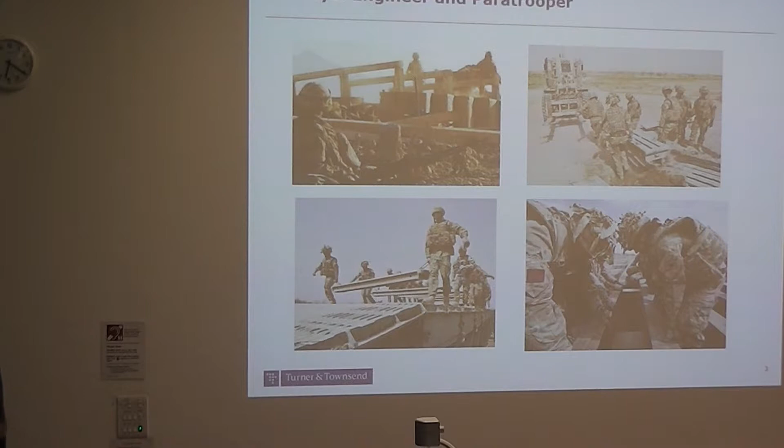So just a bit of background, not so long ago, about 8 years now, I was working as a Royal Engineer in the British Army, even though I'm from South Africa, and a paratrooper. So for about 6 years, I was managing construction projects all over the world. In Afghanistan, I did 2 tours, building bridges, building helicopter landing sites, roads, tunnels, all sorts of construction in arduous conditions.

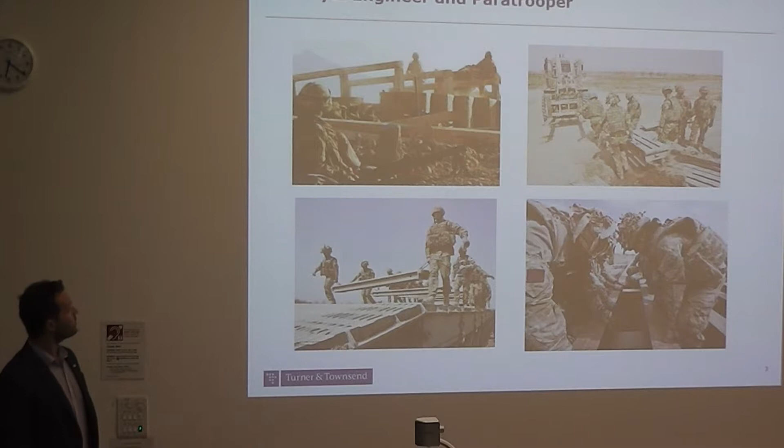I decided after my second tour of Afghanistan that perhaps I had had enough, and I went back to university as a mature student. And that was only 3 years ago. I graduated last year, so I'm very much fresh into working in a civilian context. I've been working for Turner & Townsend for a year now. I work in the technology team, so we are project managers working purely on BIM projects. Those are the 3 projects that I'm currently working on. They all range between 50 to 120 million pounds.

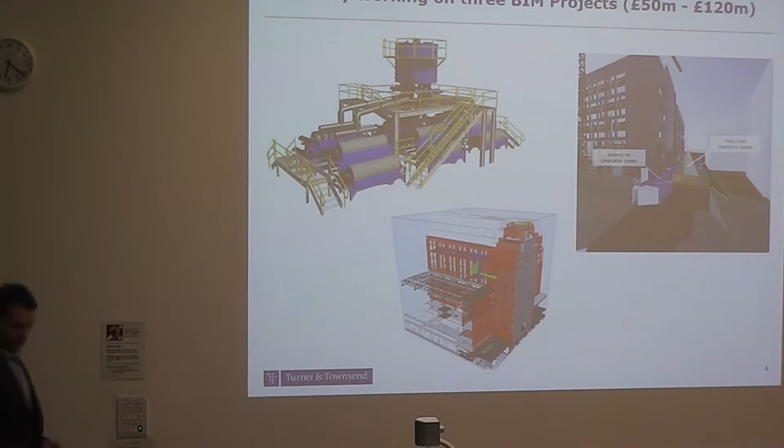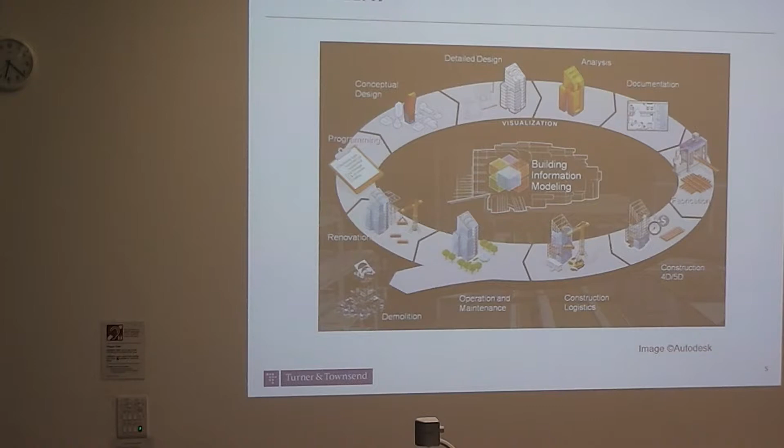So just before we move on, who has seen this slide or this diagram? A couple of you. It's hard to avoid using it because I think it's actually quite a good diagram from Autodesk. And essentially, it tells us what building information modeling actually is, as opposed to just a 3D model. The students, who's heard of BIM as a student? Okay, so most of you, which is really, really good. I hope you know that it's more than just 3D modeling.

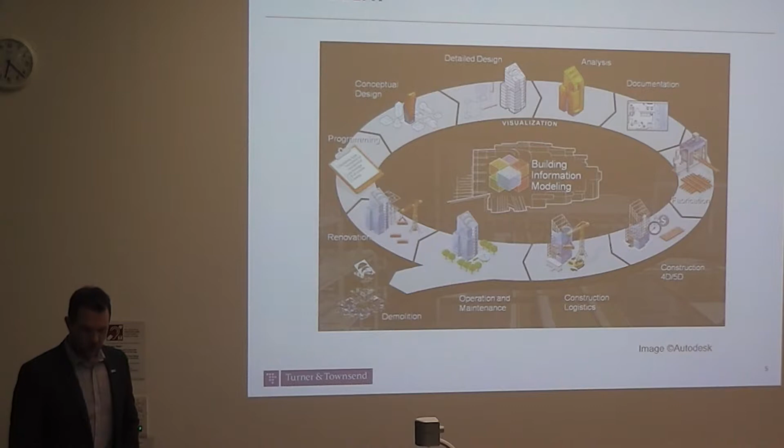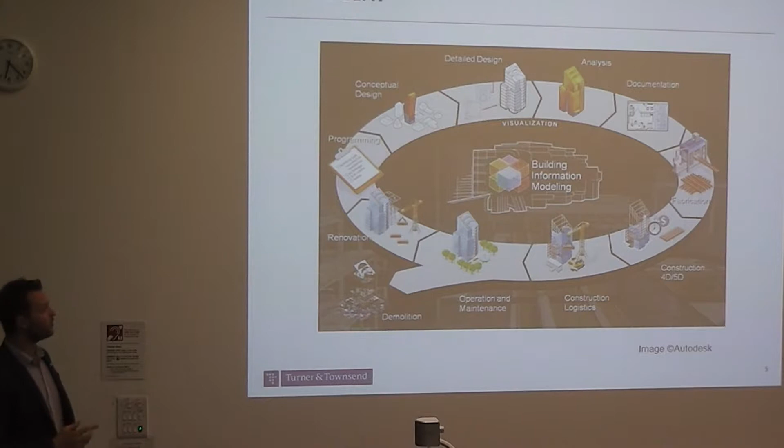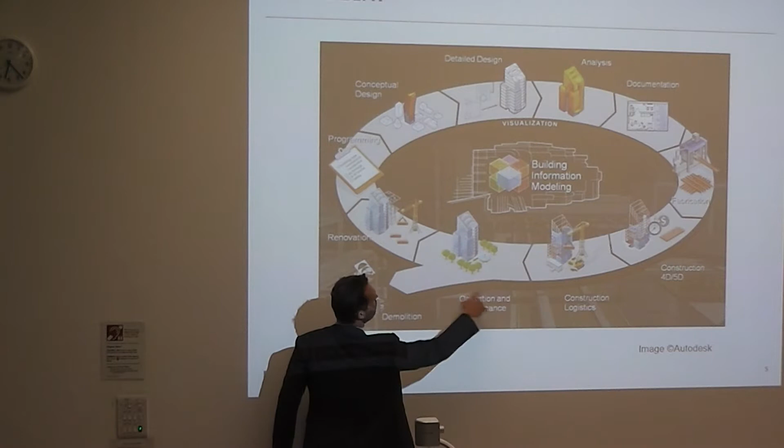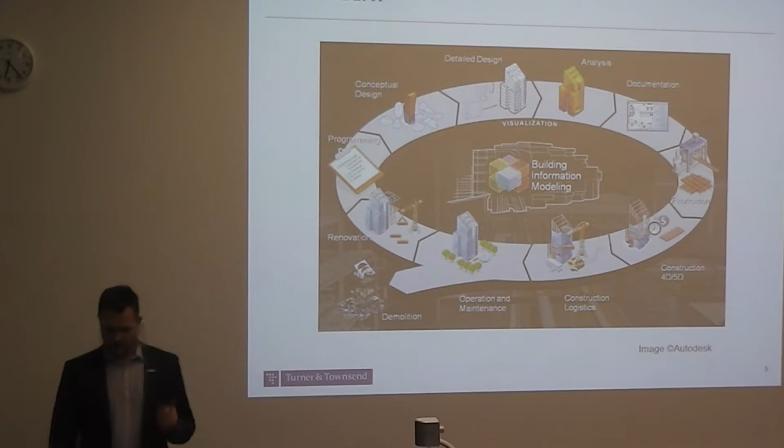Essentially what it is, it's making use of digital information throughout the whole life cycle of an asset. So even during concept design, detailed design, we carry out lots of analysis. We then produce lots of drawings from those models. We can use the models to fabricate. We can add cost information. We can add program or sequencing information, logistics, O&M, operations and maintenance at the very end before we renovate or demolish. This really is by far the longest period. The rest of it takes, I don't know, 2, 3, 4, 5 years. This takes 60 years. So this should actually be a lot bigger. And that's where I think the biggest benefits are to be had.

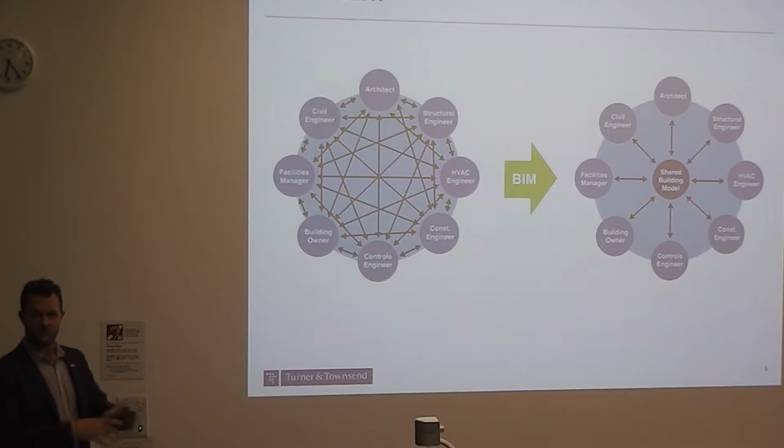So essentially, I see BIM as a methodology of working. It's just a way of working. All we're doing is, instead of sending lots of paper or emails to each other, we're now working on what's called a common data environment, a CDE. Really important to know what a common data environment means. In that common data environment, we share the same information. So I don't copy what I send to the facilities manager and to the structural engineer and the cost estimator. We all work off this single source of the truth in the common data environment, which really sits at the heart of BIM Level 2, which we'll come on to in a minute.

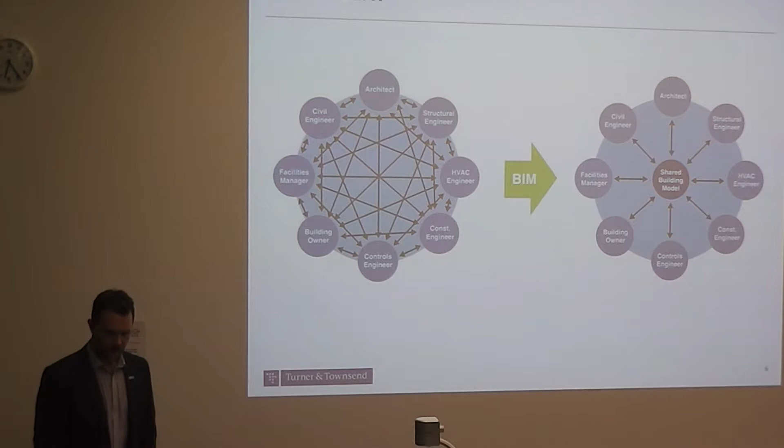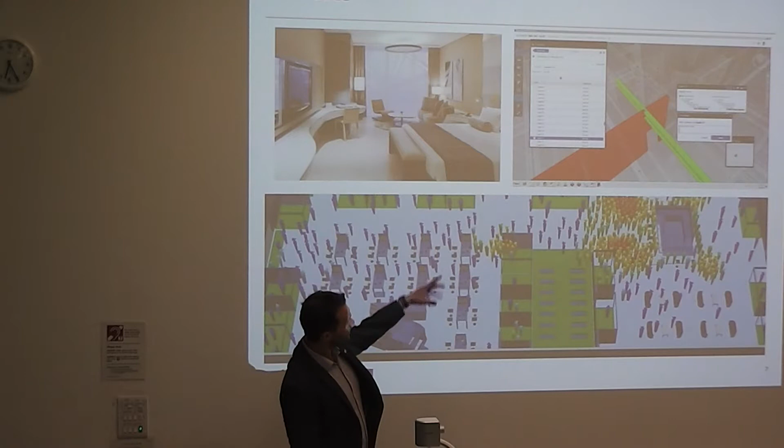And if it's extremely congested around the checkout areas or the escalators or entrances, then we know we need to change the design to accommodate a day where there's lots and lots of people. So you can actually influence the design right at the very start, so that you don't have to build it and then at the end realize, actually, hang on, we should have made the doors much bigger. Because that's catastrophic, isn't it? Especially in emergencies when people are trying to get out.

We also talk about dimensions of BIM. The fourth dimension, or 4D, is really taking a model and adding planning data to it. So, any project managers here? One? I saw one. A planner. Brilliant. Okay. Planners and PMs. So you must be familiar with Gantt charts. That's all you look at all day.

So what we're actually doing now is, instead of trying to interpret Gantt charts, we link an activity with the model. So if it's going to take us 6 weeks to pile, we just connect it to the piles, we link it to the model, and we can actually play the sequence off. So we can almost build it in a digital environment. And if there's a clash or if the sequence isn't right, we can actually change the program to accommodate that.

This is incredible stuff. For the first time, we can test the buildability long before we get on site. So we test it and we test it, and when we are 100% sure that the build is going to be as efficient as possible with the least amount of waste, then we go onto site, and then we do it once, and once only.

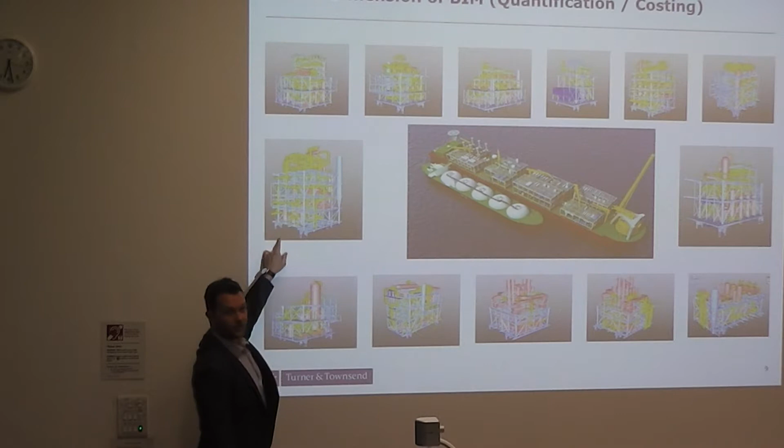And as the design develops, you can see, actually, hang on a minute, we're over budget. The client can't afford it anymore. We now have to either change the design and value engineer it in a way. We might have to remove something or replace something with something that's cheaper, so that by the time we get to the end, we know 100% that the client can afford it. Really, really critical stuff. You can't do that with paper. You can't do that with drawings.

So for cost managers, this is really, really critical. If you're a QS, over the next few years, this is what you're going to use to make your life easier. You're not going to be replaced by models and people who just do quick quantity takeoffs. It's going to make your job easier.

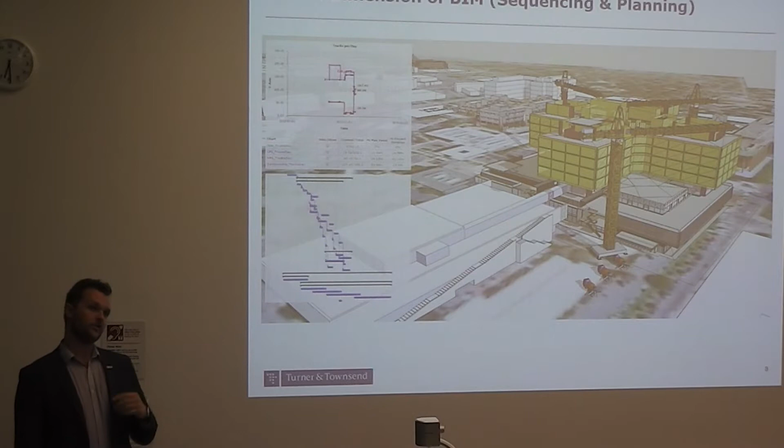Do you still have to manually put in the schedule of how long you think it will take? Yes. Yeah, exactly. So if you're a planner, this won't replace you. You still need a human being to interpret how long it is going to take to erect the scaffold and put the cladding on. Computers can't do that yet. So this bit is really important, but linking it to the model, you're able to find soft clashes and streamline the program as much as possible and actually condense it really, really well.

So cost managers, QSs, don't worry, this is going to make your life easier. You're actually going to become more important to the design process because you're able to focus on bringing value to the project instead of counting a load of steelwork.

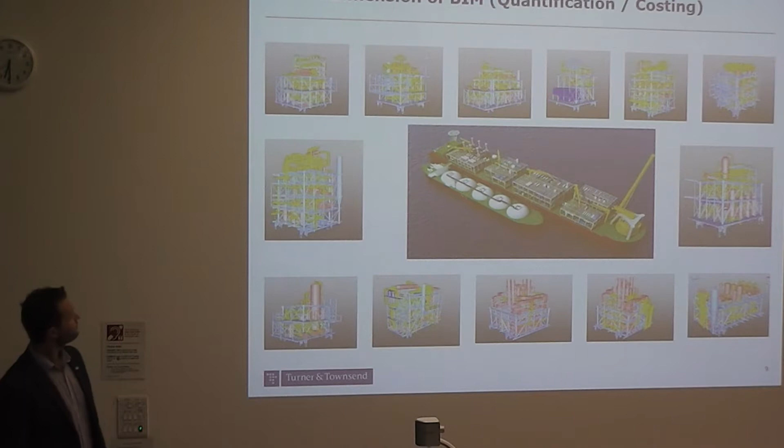Then we go on to the sixth dimension, or 6D, which is really asset management, or BIM during operations. So we've designed, we've built the asset, and now we've handed it over to the client. The client's really happy because not only does he have a physical asset, he has a digital one that's exactly the same as the physical one. So this is making facilities management a lot easier.

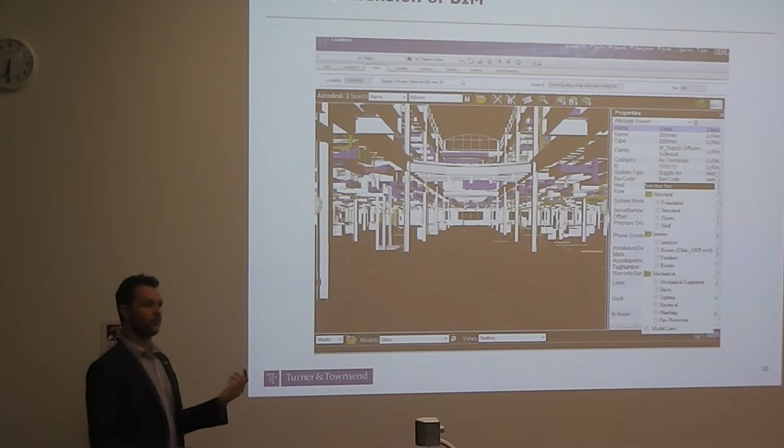On this slide, I don't know if you can see it, but there's a little red mark up there where your facilities manager might have walked on site with an iPad, realized that that fan unit is really noisy. There's something wrong with it. So instead of now having to go back into the office to go and find the drawings, to go and find the specification and find out who to call to come and fix the problem, he stands there, clicks on the fan unit on the iPad, and it brings up all the information right there. Don't have to go and look for any of it. It's right there. And this is really where we're going to drive massive, massive efficiencies. Really big efficiencies.

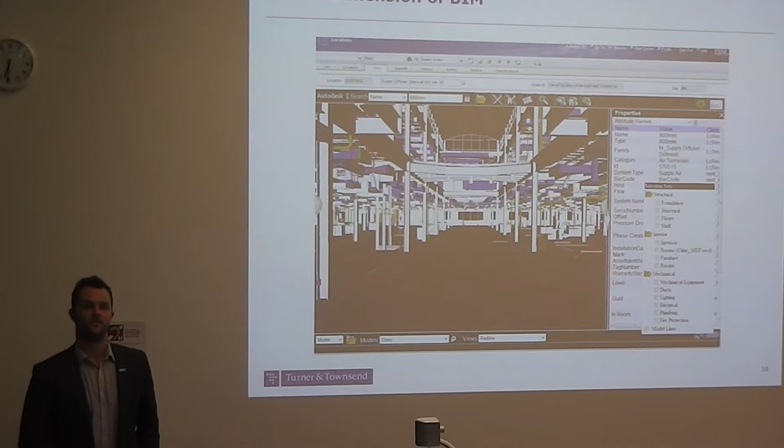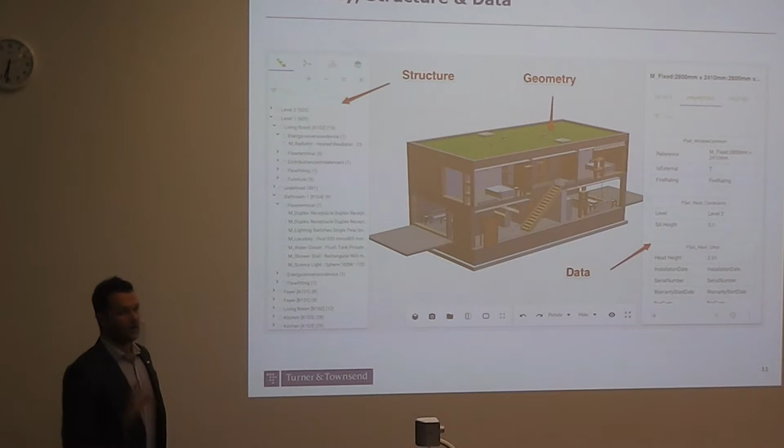So, again, you have a model, the geometry. That's really important. Of course it is. That's part of the design. That design needs to look exactly the same as the physical one that's been built. However, much more important is this information.

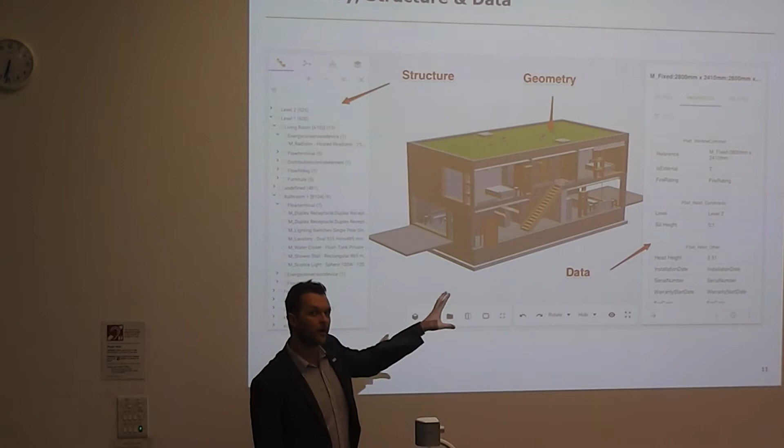The fire rating, the height, the installation date, the serial number. When's the warranty going to run out? All that's the really, really important stuff if you're a facilities manager. Model's important, but by far the data overshadows that. So that's all the information that is being held in one central location.

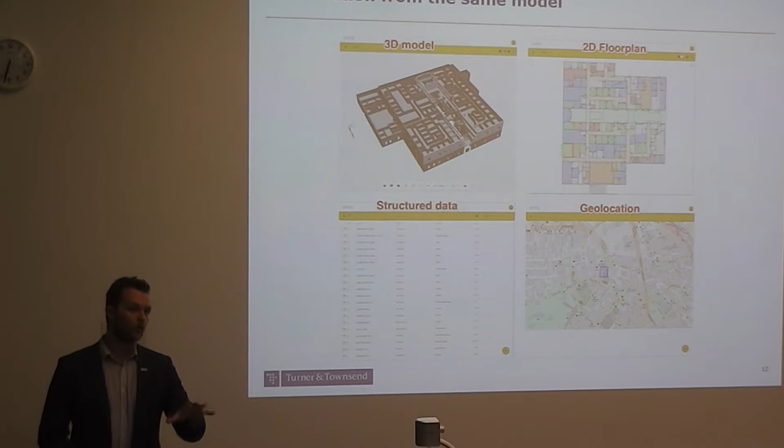With the touch of a button, you can find out anything about all your assets anywhere. Anywhere in the world even. Really, really good stuff. So why? Why should we use BIM? Why should we use BIM during facilities management?

Well, first of all, the government said, if you want to work for us on a centrally procured project, by the 4th of April this year, so in a few months, you have to be able to work to level 2 BIM. Who's heard of level 2 BIM? A couple of people heard of level 2 BIM. If you don't work towards or in line with these standards, specifications and protocols, you can't work for the government. You can't even tender for the work that they put out there.

So very important. So they spent a lot of money in producing all these publications. Mervyn Richards, who some of you might have heard of or even seen speak, is the author of some of those specifications. Critical to the delivery of these projects. So I'm just going to go through those very quickly. PAS 1192 Part 2, obviously very important. It's a specification for information management during the capital phase.

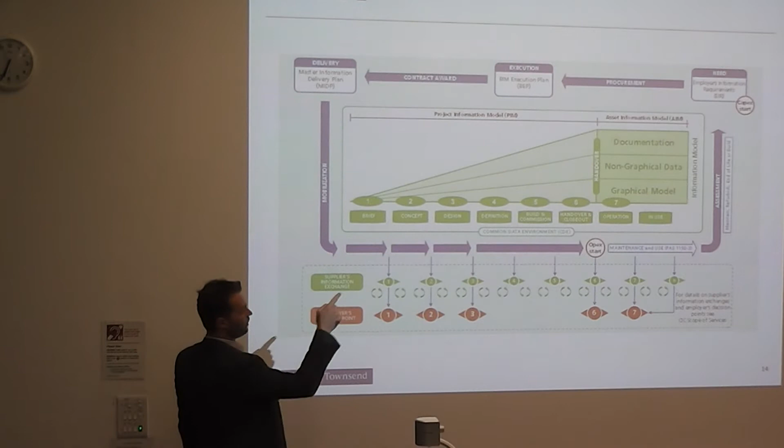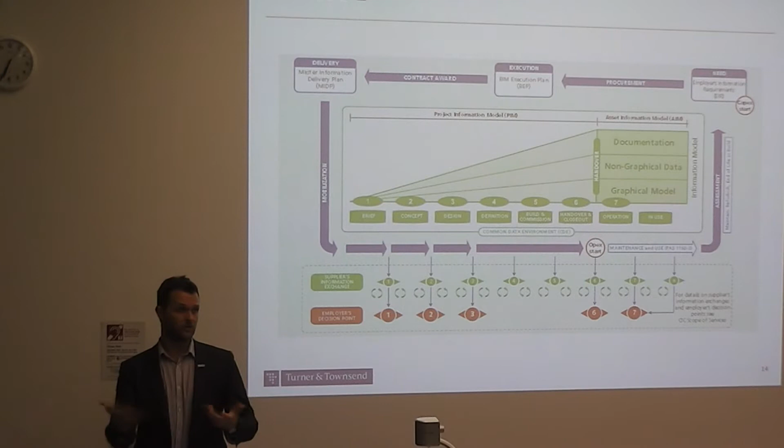But what it says is, at stage 7, you must hand over an asset information model, which consists of the graphical model, the non-graphical data, we've spoken about data, and all the documentation that surrounds that. So O&M manuals, still going to be a PDF, but at least it's digital. And if it's named properly and serialized, we can find it really, really easily.

PAS 1192 Part 3, AIR. This is a requirement. You must define your asset information requirements before you even start the project. Before you start the project, before you start designing, before you appoint anyone, you need to establish and define the client's asset information requirements early on.

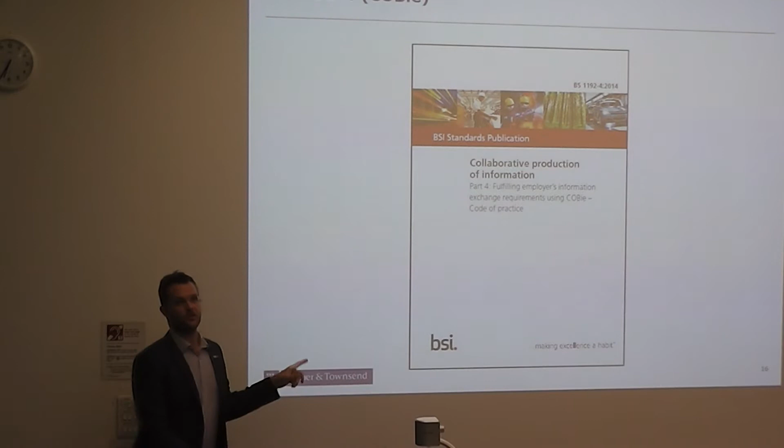BS 1192 Part 4, COBie. This tells you how to hand over all the structured data to the client. Client being the government. So only on public, centrally procured government projects. It's a requirement. You have to do it. Another pillar on level 2: if you work on a level 2 project, you must comply and deliver all your projects in line with the Government Soft Landings specification. The whole section 6 of that framework is focused on facilities management.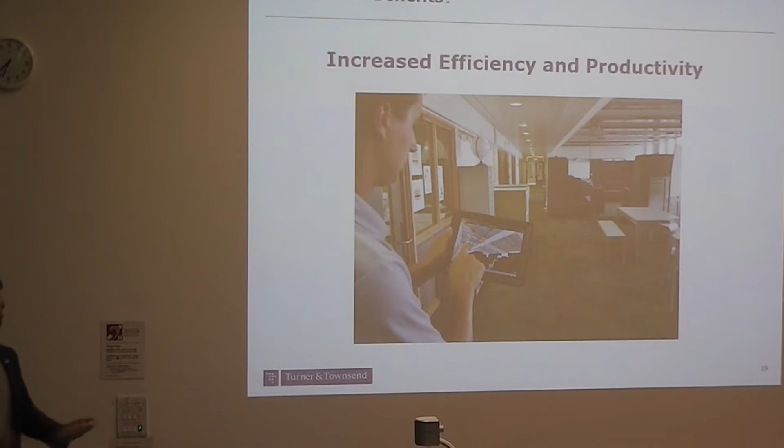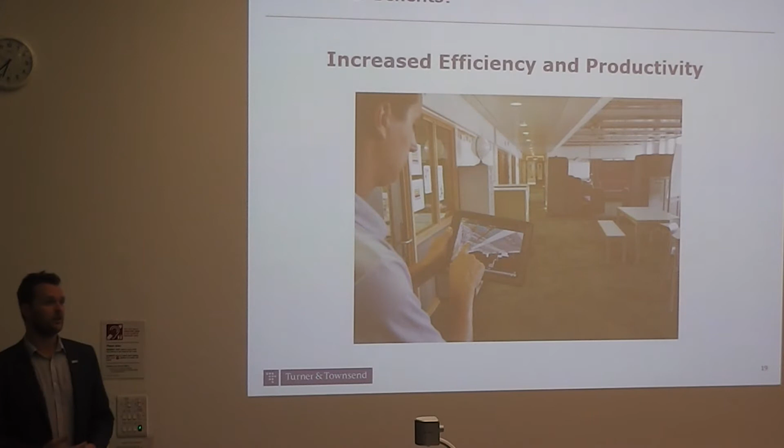If you're able to walk through your asset with all the digital information at hand, and if you're able to report a leaking pipe, or a light bulb that's blown, or a door that's creaking, if you can report that straight away, and someone can come and fix it instantly, imagine all the savings that can be had there. Huge savings, massive increase in productivity. So even if the government doesn't tell you you must do it, as a client, I would definitely harvest all those benefits.

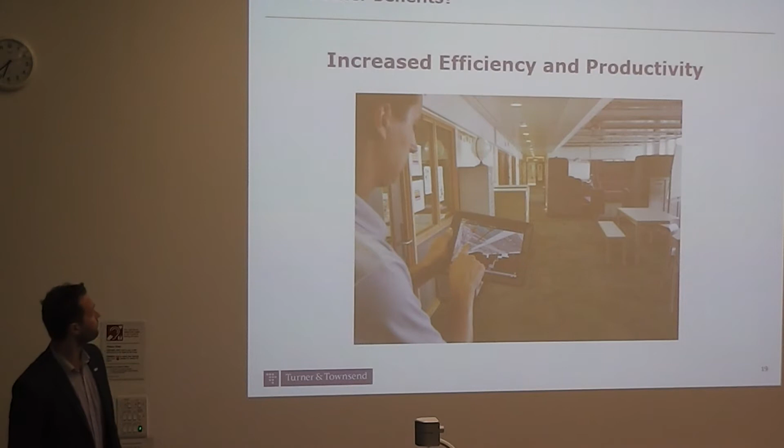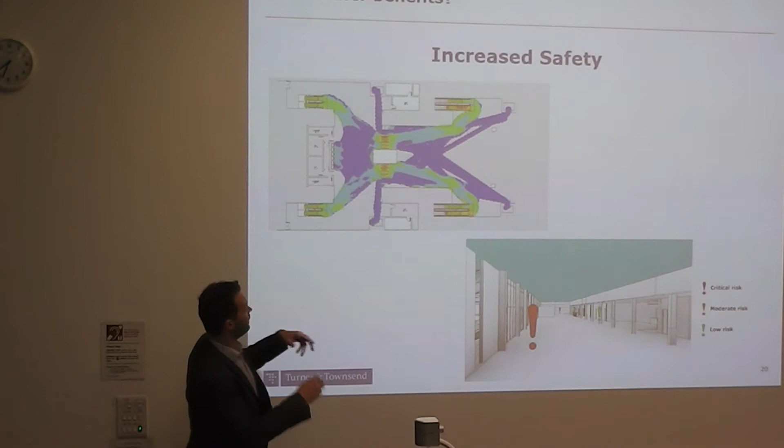Increased safety. I spoke about pedestrian simulation. This is a model where we simulated an emergency, a fire, and we looked at how people react in an emergency. You could clearly see how congested it is at all the fire escapes, and whether they could get through all the turnstiles and easily escape from the building within the allocated time frame during the design stage.

So if we use BIM in the beginning to analyze and test all these scenarios, we know that if those people can't escape within a certain time period, we need to add more fire escapes or just make them bigger and allow people to evacuate much quicker. Massive increase in safety during operations.

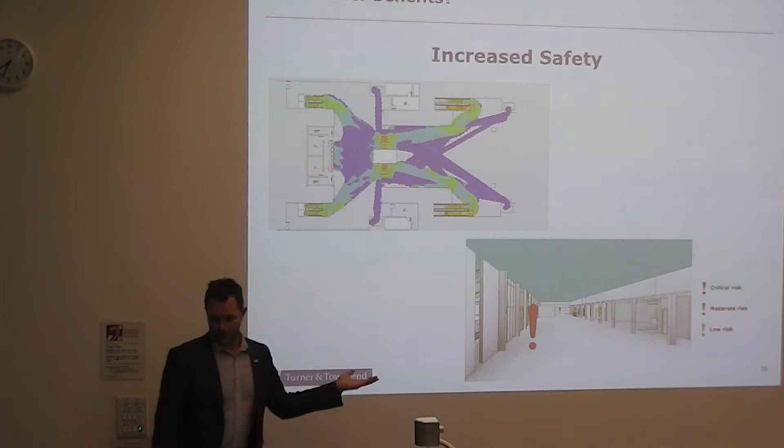Also, if something broke down in your facility and someone had to come and fix it, the person who comes and fixes it can look at the model and look at all the risks. If I had to change that light tube and I wasn't on site, how would I know what equipment I would need to come and fix it?

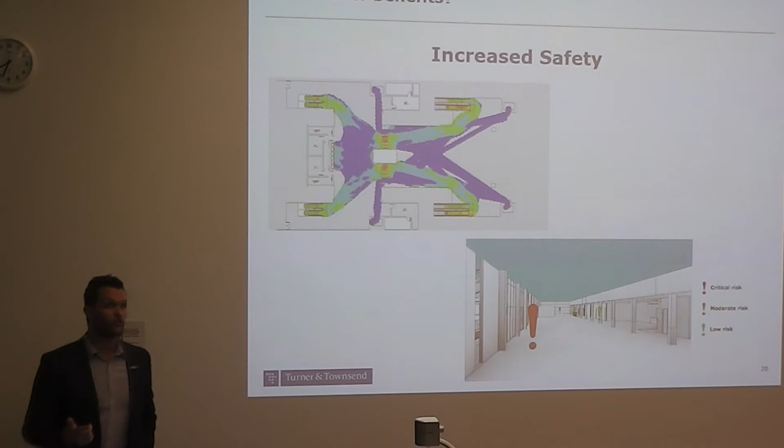If I could log into your system and see what this room looks like in a model environment, I can see, actually, hang on, I'm going to probably need a scaffold tower to fix it. So you're able to preempt all the equipment, all the safety measurements that you have to put in place before you get here. Because you don't want to get here and see, actually, hang on, I can't reach it, and then have to go back and come back again. Okay.

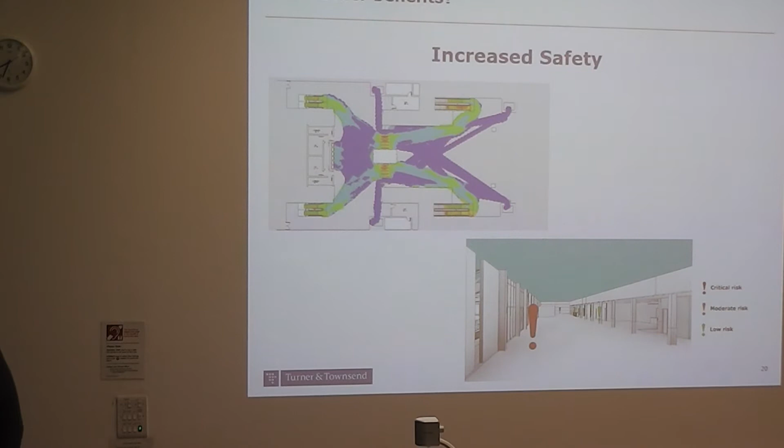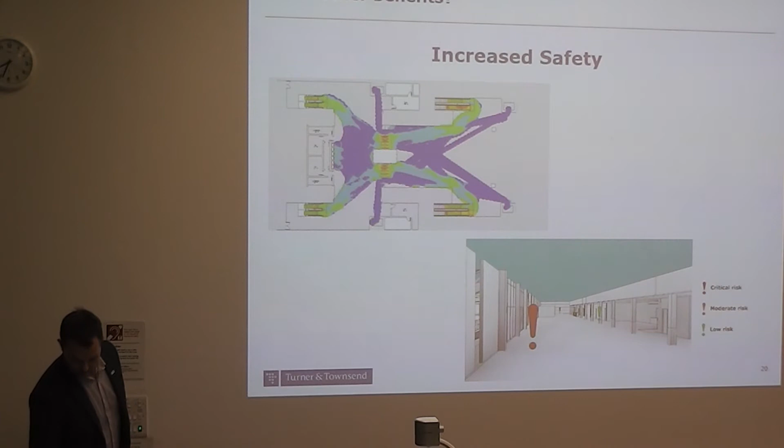So, we've got all the benefits of why. How? How do we do it? This is the difficult part. And as a project manager, this is pretty much what I do on a daily basis. Okay, how do we do it? Well, first of all, the model and information delivery must be tailored to the operational requirements. You don't just start and do it if you don't know what the information should look like at the end.

So really important, which is why the end users and the facility manager must be engaged from the start. I don't see it ever, apart from the projects that we work on now, where it's a requirement. We tell the client, we'll only support you if we have your whole operational team there to help influence the design. Okay, so really important.

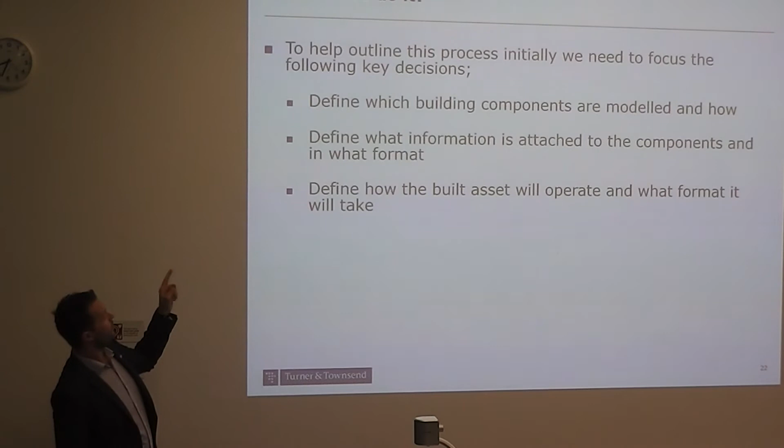You must define which building components are modeled and how, because we don't model everything. We don't model skirting boards, architrave, light switches, and all the rest. You could if you really wanted to, and if that's what the client wanted. But the design team really needs to understand, what does the client want when I hand over that digital model? We don't model nuts and bolts of everything. It's way too much detail, too time consuming, costs too much money.

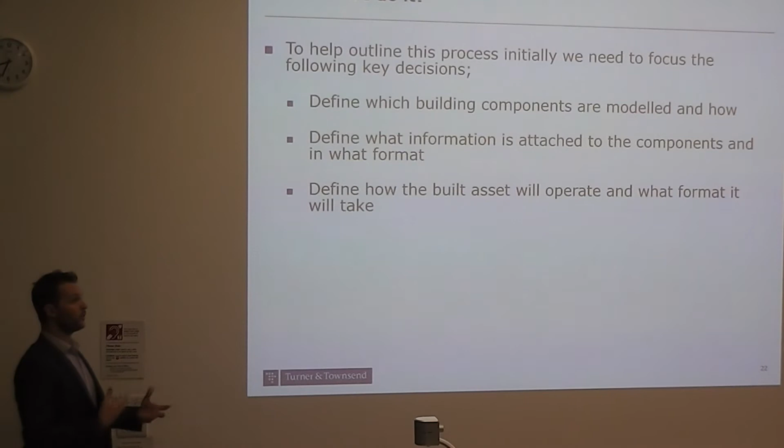Okay. So what information must be attached to those components? And how will we use that information during operation? Three really key important points. So, people, understanding your operational requirements. It's important to understand who's going to use it. Is it one person sitting behind a computer who is going to manage the whole facility? Or is there going to be a team of them using iPads? You need to understand who's going to use it.

And what will they use it for? Is it only information for if something breaks? Or are you going to look at all the other facilities management aspects and use that digital data? Importantly, is what you're going to hand over at the end going to replace what they're currently using? Or is it just going to be enhancing what they're doing?

Because people can be really funny. If they've been managing a facility for 20 years using the same systems, and all of a sudden you come in and you say, well, by the way, at the end, you're going to have to use models and data and all this digital stuff, they get their backs up against the wall. And this is really important to engage with the people and say, this is the way we're going to do it, and really involve them in the process.

So how are they going to use it? What other systems will it interface with? Is it something they're familiar with? If they're not familiar with it, what training do you as a client have to organize? It's great having all this information at the end, but if my operations team can't use it, it's useless. Then there was no point. So training is really important as well.

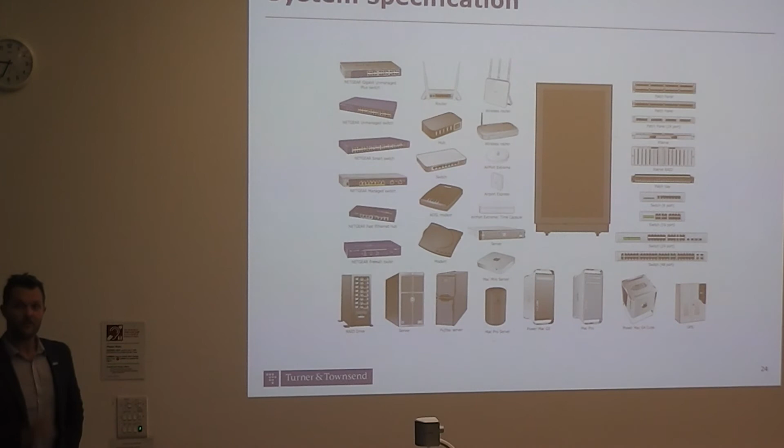Is it going to be stored in the cloud? These days, lots of information is being stored in the cloud. Or is it going to be stored in a server rack? Is there going to be a server room holding all your information? If you decide to put it up in the cloud, if you're the Ministry of Justice, building jails, then you need to be very, very sure that your information, all your models of all the jails are extremely secure. Because you don't want anyone breaking in and stealing all those models and knowing exactly how to escape out of jail. Things to consider.

Taxonomy or nomenclature is really just a term to say, well, okay, how do you currently name your things? What are you currently doing? Do you call it a pump, or do you call it a hot water pump? How do you label it? Because most clients already have information on their assets, and it needs to be streamlined with that information. So what are you currently doing? What do you call things? How have you divided your buildings into zones? Have you divided them into specific rooms? What did you call those rooms? And is the design team actually using those same naming conventions?

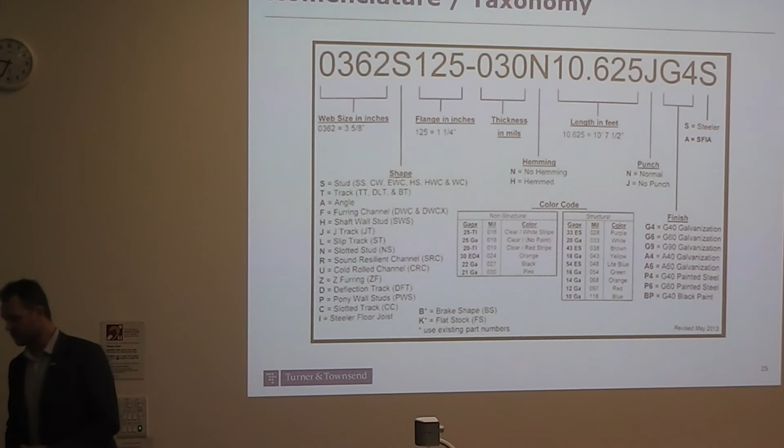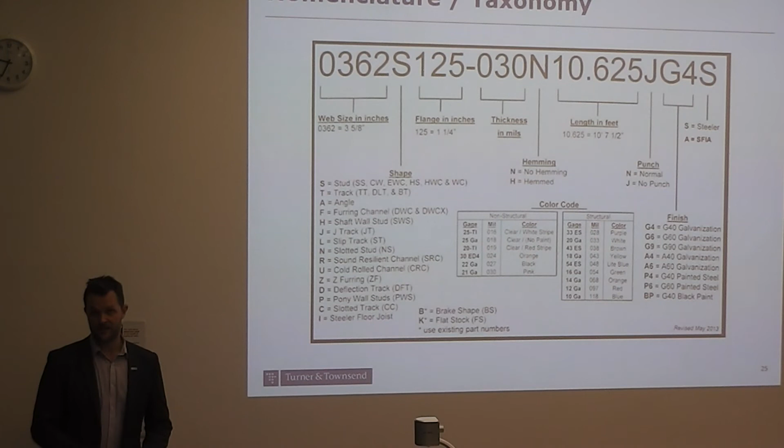Also, I saw an example of a client who said, I want to be able to walk around with a phone and scan a barcode or a QR code, and I want all the information of that asset to pop up on my phone. So those are the things you need to be considering. Other clients might say, actually, hang on, that's probably going to cost too much and it's slightly overkill. We'll just put a label on it with the correct asset tag on it. So those are things to consider.

When it comes to the requirements, I already said that it's important to engage with the FM team early on. So the project managers need to sit with the FM guys and say, well, okay, if this is a two-stage fit-out, so a Cat A fit-out and a Cat B fit-out, that means the guys who build it first won't be the guys who actually finish it. So how's that being procured? Because if my first team builds it perfectly in line with the protocols, and the second team come in and do all the internal fit-out but don't adhere to your standards and protocols, you're not going to get quality asset information at the end. So someone needs to manage that process really well. How's that being procured? Who's managing that?

Also, are the designers and the contractors aware of all the requirements? Are they aware that everything you've asked for has been documented and is in their scope of appointment, so in their contract? Because if you haven't captured all those information requirements in what's called an EIR, the Employer's Information Requirements, and it's not in the contract, and they get to the end and don't hand over a model or the correct data, and you say, well, hang on a minute, I asked for this. If it's not contractually binding, you can say goodbye, because you're not going to get it. So use the protocols that are out there at the moment to make that contractual arrangement and put it in place.

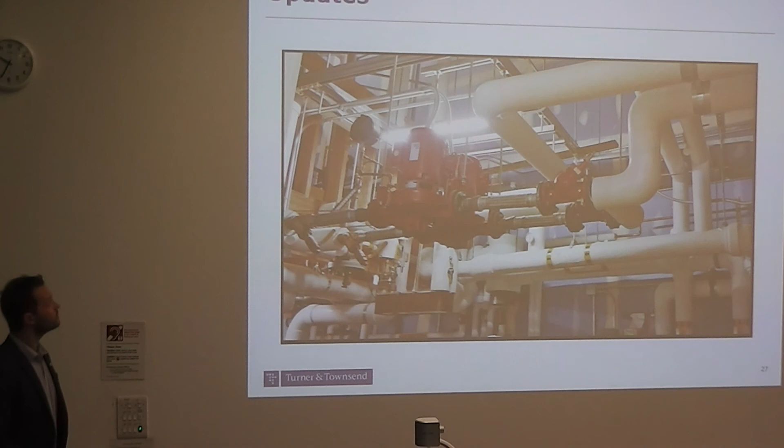What happens after the building's been handed over,